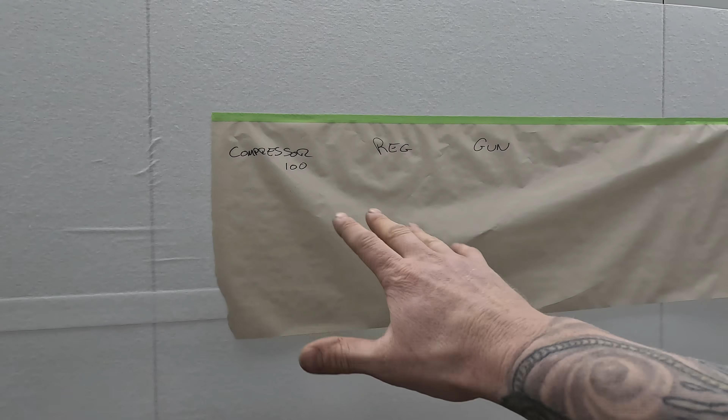There are a few key things that you do have to understand with air pressures. So I'm gonna do a little bit of a diagram here, and I don't know if it's gonna be any good, but we'll get to that in a minute. So this is a diaphragm regulator. The importance of this is it will keep any upward pressure out, if that makes sense.

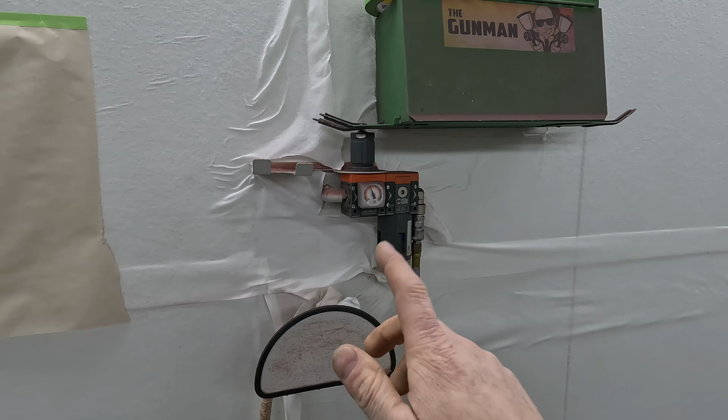We've got a really good high quality Atlas Copco compressor on the other side of that wall there. It's worth about $20,000, so it is definitely more than capable of keeping up with the volume of air that we need. We've set that, I think, to 90 or 100 PSI. We've got big 3-inch diameter air hoses coming all the way to here. But just because you've got yourself a big compressor, that doesn't even guarantee that you won't get air fluctuations.

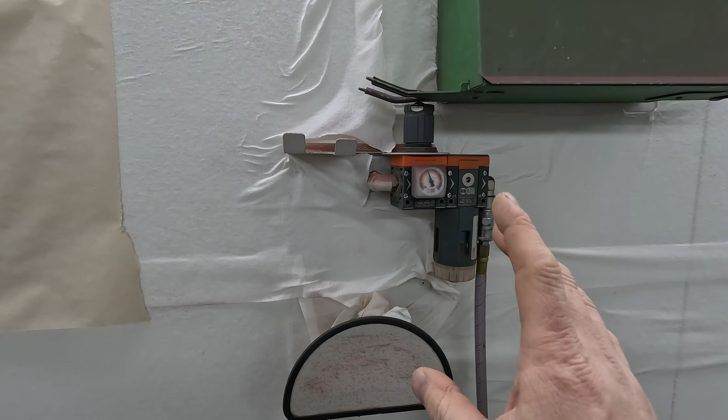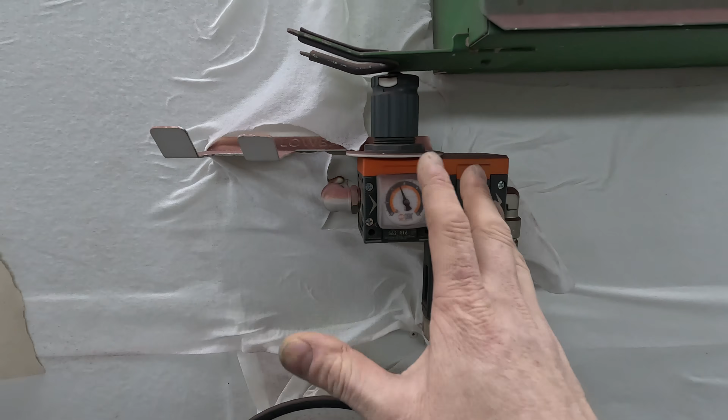So what happens when you're getting air fluctuations? It's usually if that is too high, right? We've got that set to about 70 or 75 at the moment, as you can see there. I find that's a good starting point. You may need to go up a little bit if you have an air hood that requires more air than mine. I do have an air hood, and I've found that 75 is enough to power every single spray gun. To be fair, I don't use HVLP, so I may need to crank that up a little bit if I'm using HVLP. But the reason you want that as low as possible, right?

When you're setting your spray gun, you want to have the air on the spray gun completely open. Open those valves right up. Open your cheater valves, open the valves on the gun itself, and adjust it from the wall. Give yourself a little bit extra than what you think you need. So if you want to be spraying at 2 bar on the spray gun, you want to have it running at 2.2 when it's fully open. So open it up fully on the gun, check your gauge, and while you're holding that trigger down, this is where you adjust it from.

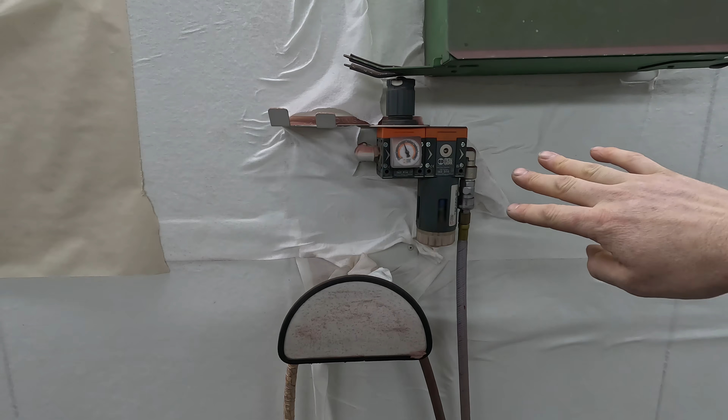So what happens when you get air fluctuations is, you'll probably find you've set your gun when the tank is full on your compressor. Your compressor will be full right up here, and once it gets below a certain point, the compressor has a switch and kicks back in, and that's when you'll go up and down, up and down, if that makes sense. So the important thing about this is it's actually restricting the flow, right?

You're telling it not to give you all of the pressure, all of the volume of air which is behind it. So that's really the most important thing to understand. These are called a diaphragm regulator, and it will restrict the volume of air which comes through, basically. So that's a really important thing. Let's just say we've set our compressor, I think it's 90 or 100, but as I say, we do have the big diameter, so the flow is not going to be an issue.

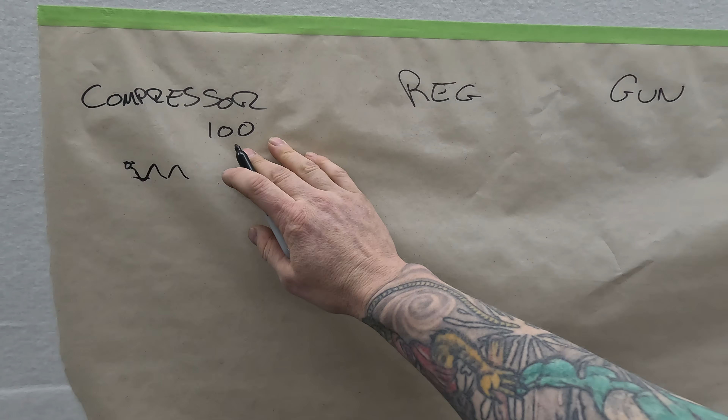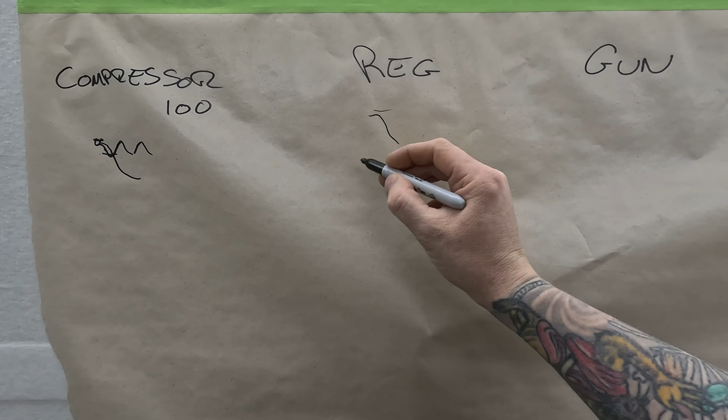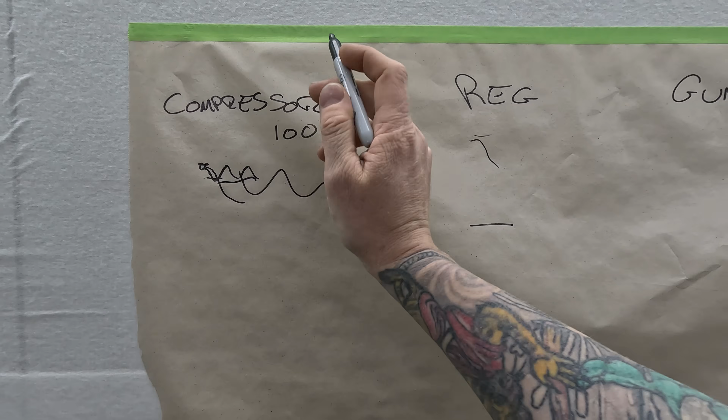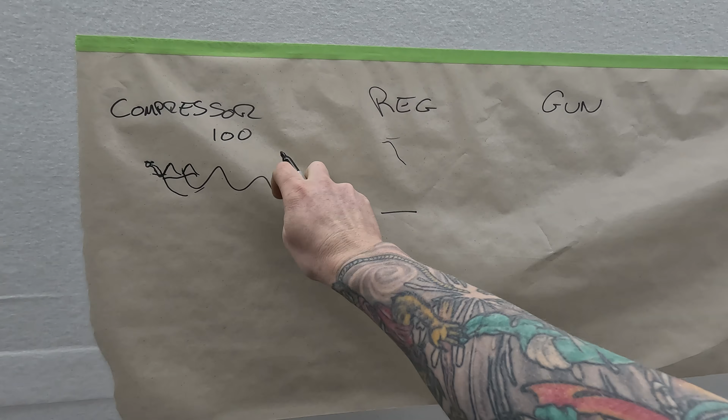Now, like I said, we've got a 3-inch diameter, so we really don't lose much from our compressor to our regulator. But if you're doing a home setup and you do have longer air lines, you'll lose a substantial amount. So that's where you may want to install a tank, like a receiver tank. That will sort of help. But again, once you're doing a long spray or an orbital sander session, once that tank depletes and you're running off the compressed air, you still may find that you run out of air.

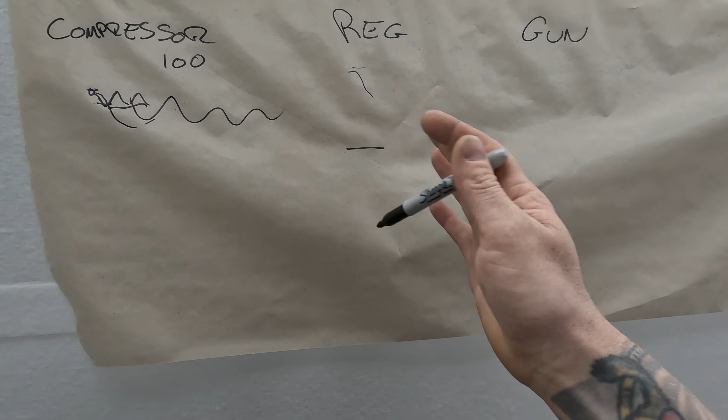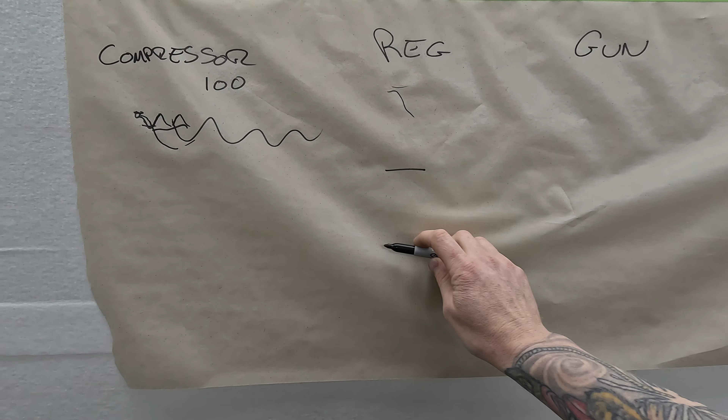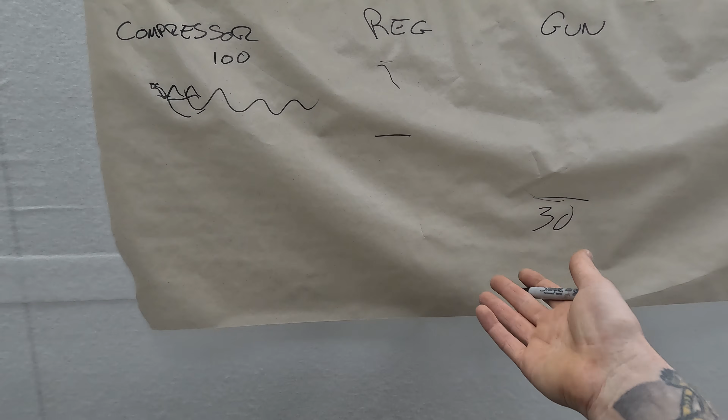So if you do what I'm saying, get that diaphragm regulator as low as you can while still having enough at the gun, right? Because again, you will lose some. So the gun might be down at, say, 30 psi. That might be 25 to 30 psi, however much you need. Maybe 25 on your base coat, 30 for your clear coat, right?

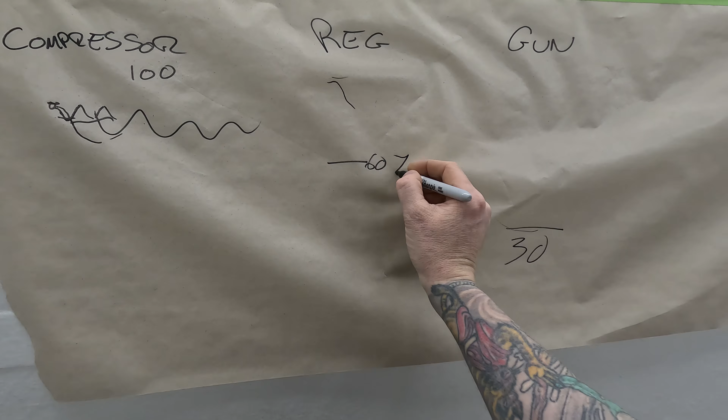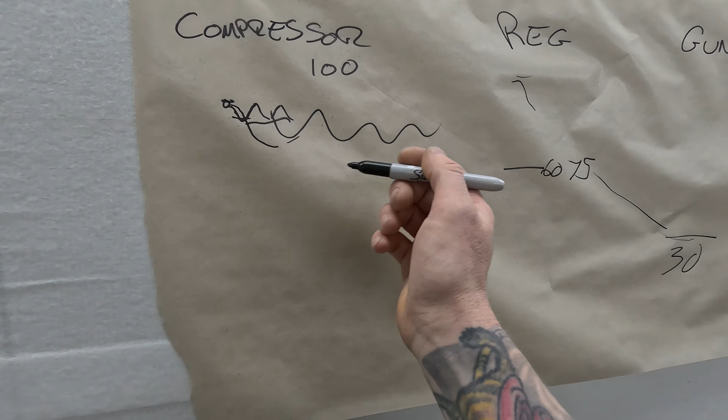But then the regulator, I find at home, 60. That's where I've got mine, because I don't use an air-fed respirator at home. So I've found 60 psi is perfect for me at home. But here at work, we're running it at 75. And by the time it gets to the gun, you're still around that. So you do lose a bit of air in the airline. But like I say, the compressor's probably going to turn on at 80, right? And all of those fluctuations don't matter, because you're down here.

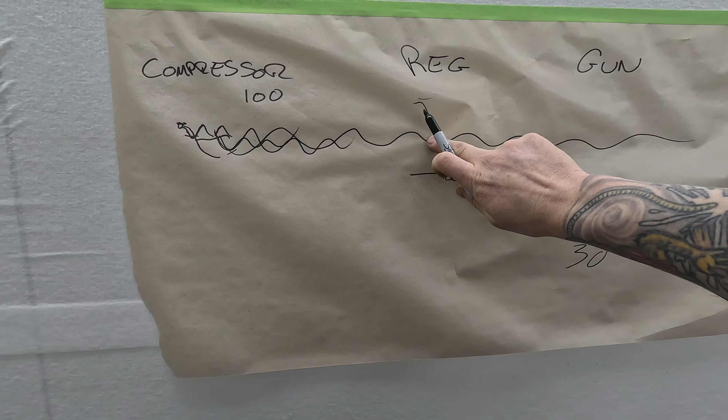The only time I could ever lose pressure here, and I don't think it would even be possible, I reckon you could have an air blower on every single one of those points outside and it wouldn't even touch me in here, because it would kick on early enough, kick on and off a lot, maybe more on than off. But because it's all happening up there, it will not affect me down here, if that makes sense. So it really is quite basic once you get your head around it. I hope my diagram helped. Like I said before, if you can't explain something in simple terms, you probably don't understand it that well yourself.

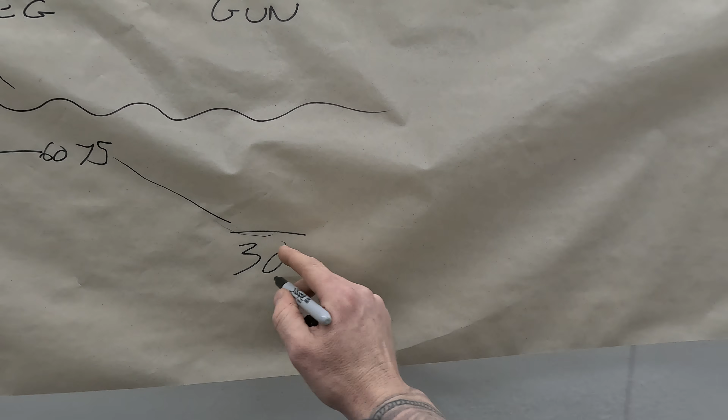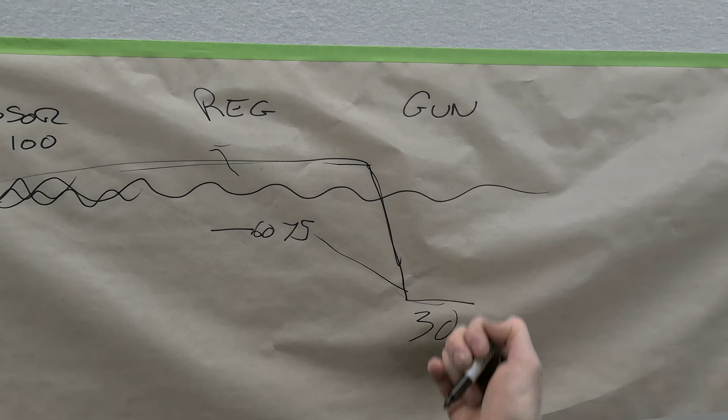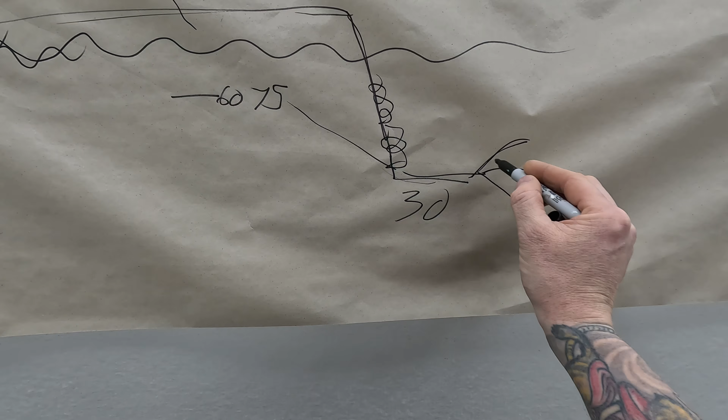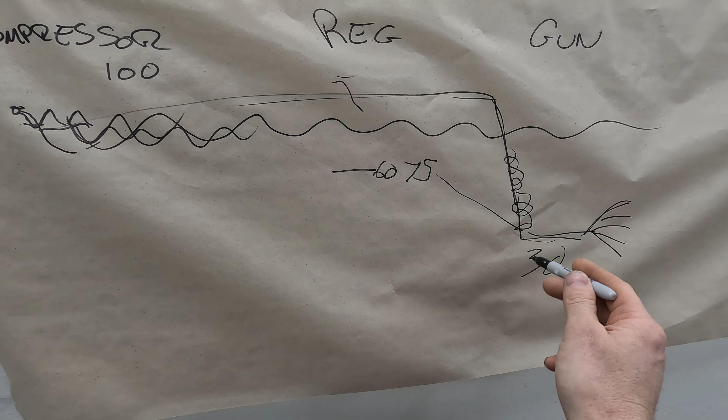Another thing, some people say that a spray gun will operate better when it's using all of that air. I'm not really fully convinced. I think what they're saying is, if you want to run that spray gun at, say, 30, but you've got all of this 100 behind it, going straight from there down here and cheating it down on your cheater valve will create turbulence, and that will alter the way it comes out of your spray fan. So I'm not sure about that. I've seen a few people make a decent case for it, but if you do what I've done here, you should be pretty close to not getting that anyway.

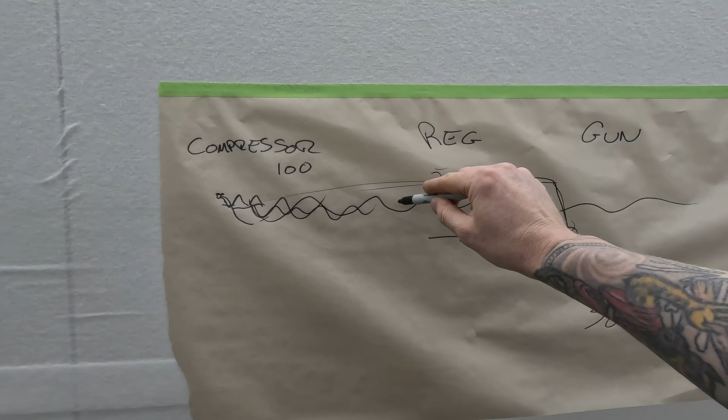Previously, like I said, 10 years ago, I would have always said give me as much air pressure as you can get. Wouldn't that make sense? But once you understand the way a compressor works, the way I've shown you here, and the way it's going to be turning on and off, it should make sense why you're getting your air fluctuation.

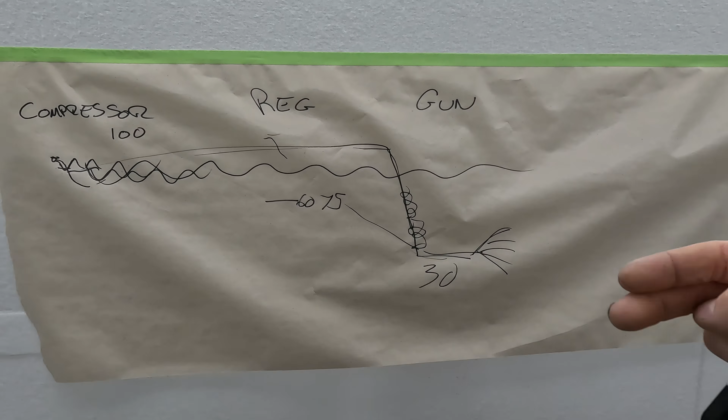This video has been bumped up to the top, partly because I've been pretty busy at home and I haven't got a video edited this week, and this was an easy one I could shoot in one take without any editing.

But the other reason is that a guy from England, Andy, was asking me about this. He was setting the pressure on his gun and thought it must be a faulty gauge. The first time I explained it, I don't think he quite got it, but he got it in the end. He did what I said, and I thought, next time this happens, I can just say go and look at this video.

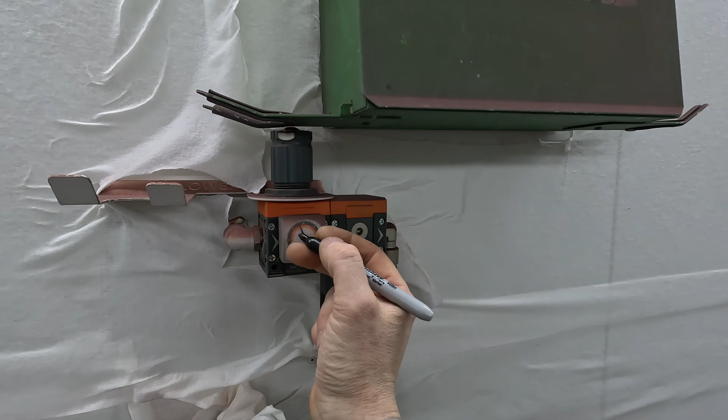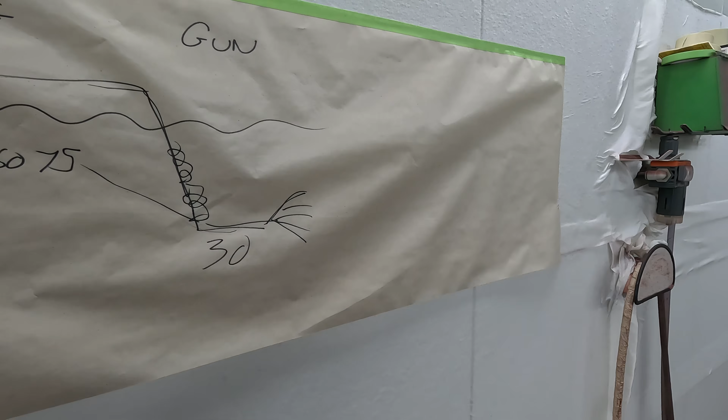Really all you need to know is get that regulator as low as you can while still having enough at the spray gun. So open the spray gun up to full air pressure, and then knock it down until you get the desired pressure on the gauge. It really is that simple.